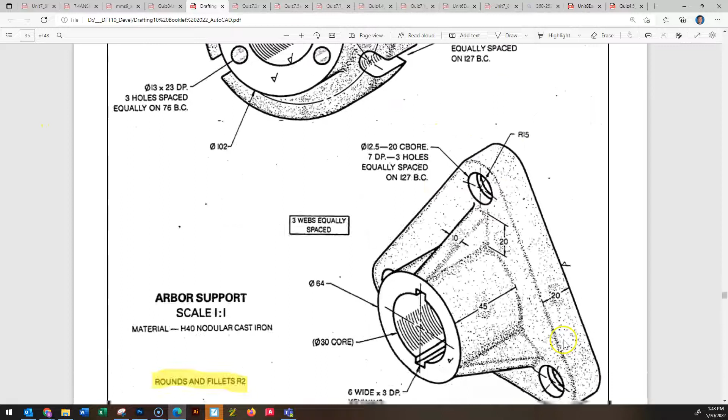You can do some practice here on the arbor support and on the rotary yoke, and I believe the arbor support is the one I want you to hand in.

The idea of an aligned sectional is very similar to a half sectional. The problem is there are sort of triangular elements in these drawings that make a vertical cut straight through the object from top to bottom. They don't give the best representation, because the bolt holes, although there is one dead center on the top, if you look down at the bottom dead center, there is no bolt hole, but there are still two here, in kind of a triangular format.

So it's generally used for objects that have triangles in them. If you were to cut this object directly in half, you would be misrepresenting the bottom part. And if you drew everything straight over by going through, say, this bolt hole, then you end up with an item on the section view that's shorter than it should be.

So what we're going to do is go through an aligned sectional here and show you how you build these things. I've created the beginning portions of this drawing already since you know how to do all of these things. I've also included a cut line that indicates this object is going to be cut down the middle to the center and then out through one of these bolt holes and one of these end feet. I also created, by hand using an arc and trim, a couple lines to make an arrowhead indicating this is an aligned sectional.

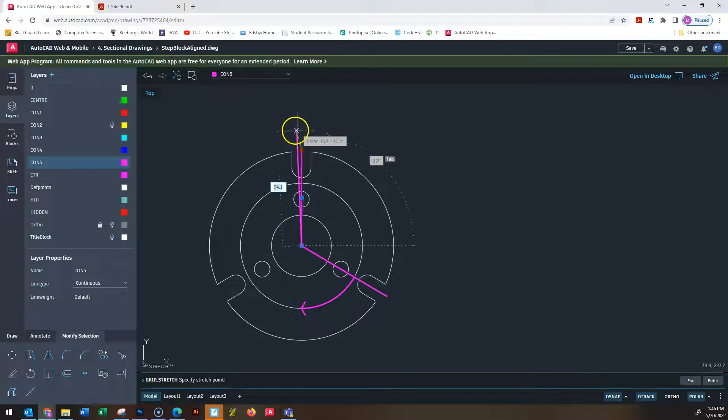Just extend my cut line a little bit, and I did make my cut line thicker as I normally do. I believe I've got this set at 0.3 millimeters, so that's a good measurement. You might want to do the same.

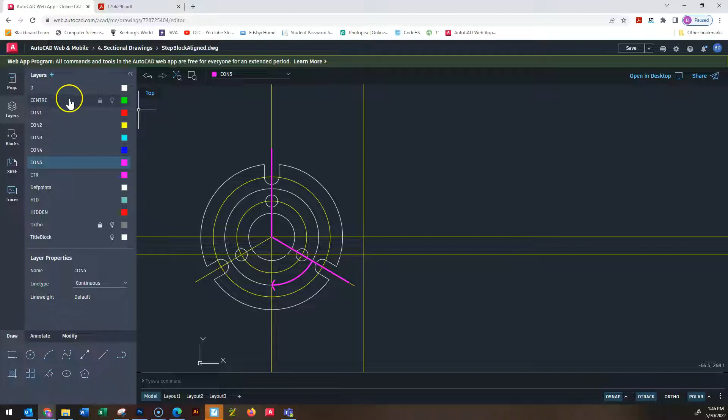I'm going to turn on my construction lines here, and I've just got a starting point. Remember, whenever we turn these objects, we always turn them so that the nose is pointing toward the front view. So my nose section is going to be here, and I should put some construction lines down to help me out with those heights so I don't have to do a whole bunch of measuring. I can just sort of trace them across. So I know that I'm going to need a line there.

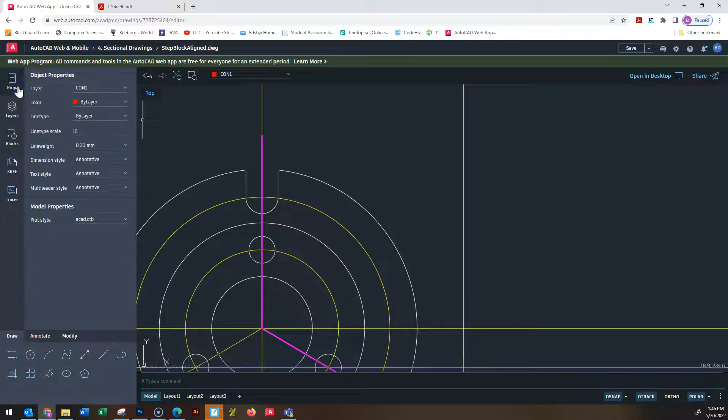Oop, still got my line set at 0.30. Don't want that. Properties, that should be set to by layer.

So let's draw some construction lines for heights that I know I'm going to need. Need to know where that slot is. Going to need to know where the bottom of that slot is. Going to need to know where this nose is. And where this circle is.

Top and bottom, and then I'm going to throw some center lines in just so I don't have too many lines of the same color running across my page. So I'm going to turn this one right here. I'm going to call that a center line.

Oops, change it. It already exists, so I'm going to select it, and I'm going to go to my properties. I have the right line selected, this line. Go, and I'm going to change that to layer 5 so it's a different color.

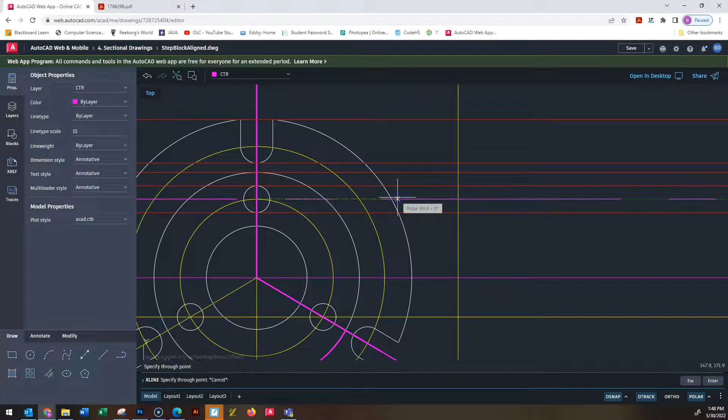Then I'm going to draw a couple more to represent the center lines for that drill hole. Except I don't want the actual center line pattern, I want it to be a continuous line, and then I'm going to do the same thing one more time. I didn't want the long dashes, short dashes. I just want it to be a line that demonstrates where the center of these circles, holes, and features are.

Once again, this is going to be, by default, the center line pattern.

So I'm just going to change that so that it is continuous. All right, so I've got some features there.

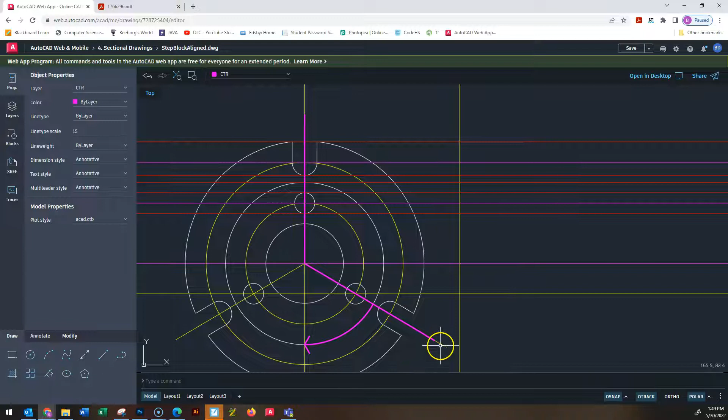When I'm drawing an aligned sectional, almost always the bottom half looks exactly the same as the top half. For instance, if you were to rotate all of these features down to the bottom, they mirror the top part. So you really only have to build the top half, and then you can just mirror it downward if you so choose. The bottom portion is going to be a full section.

Did I say this represents a half sectional? Let me revise that a bit. Sort of. When we do a half sectional, it's really a quarter of the object, right? You're seeing the inside of the object as well as the outside of the object.

So the cut line goes down to the middle and then it goes straight out the side. That would be a half sectional, whereas the full sectional is really half the object, right? You go straight down the middle and out through the bottom, and that will give you a full sectional representation. So it's sort of between the two, I guess.

It's probably closer to a full sectional because instead of going straight out the bottom, I'm going out here, but I'm also rotating all that stuff to the bottom. So it's probably going to look more like a full sectional than a half sectional, but the idea that it doesn't go directly out the bottom is sort of like a half sectional. So I guess it's kind of a combination of the two.

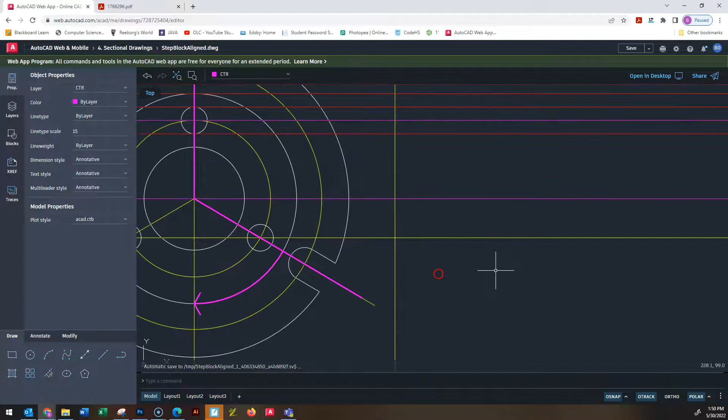Okay, now I've got to go back to my drawing, and I need a little bit more information. I only drew the front view, so I didn't represent any depth in this object. So there's a couple things that I notice in here that I just want to make clear.

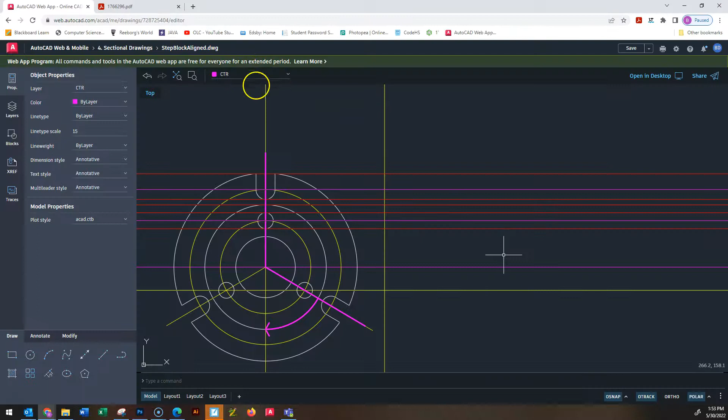I know the entire object is 42 long, from the very front to the very back. I have a starting line set up here, so I'm going to go to the back of the object, select this line, and offset it 42 to find out where the back of the object is. So the back of the object is right there.

Now I can use some object lines, because I'm just going to give myself a rough outline of where this object is going to be. This is the back portion, and this is the very front portion, including the nose. So I need to figure out where that back portion sort of ends before it starts narrowing into the nose, and the dimension is given right here.

It's 25 from the back of the object. So I'm going to go to this back of the object line and offset it 25. So from the back of the object toward the front, there's 25 — that's where the thickest, larger portion of this object is. So I'm going to draw that out. If I have to trim these lines a little later, that's fine.

As I mentioned before, the top side of the object can be mirrored down to get the bottom, so I'm only going to draw this to the halfway point. Then when I'm happy with it at the end, I can just mirror it down.

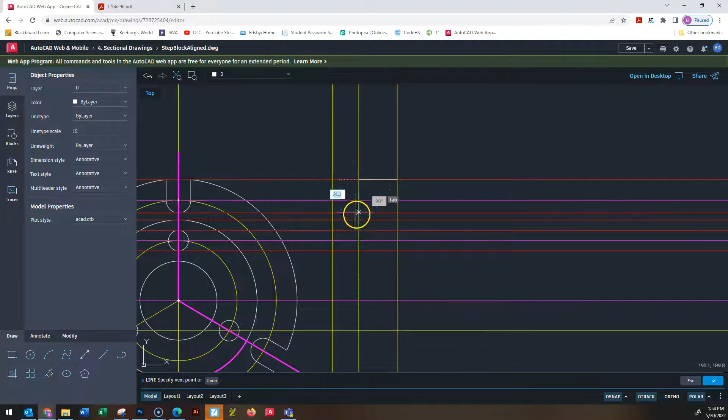So how far down does this part go? It goes down to the nose, which is that height right there, so that's this red line. Then the nose comes all the way out to the front of the object. Then I'm going to go down to the halfway point and come all the way across — that's dead center of the object if you're looking at it from the front view.

So all I've drawn is basically the top half of this object, and I haven't drawn any of the circles or features yet. I've just drawn a rough outline of where this bigger part is and where the nose is. Now we can start getting a bit more detailed on what this actually looks like.

If we're cutting this directly down the center, what we're seeing is essentially this, down to there, because we've cut it on the other half. So we need to make sure we can see the bottom of this little feature as well as this top part. We can see the top part right there. The bottom part here is just going to look like a line straight across.

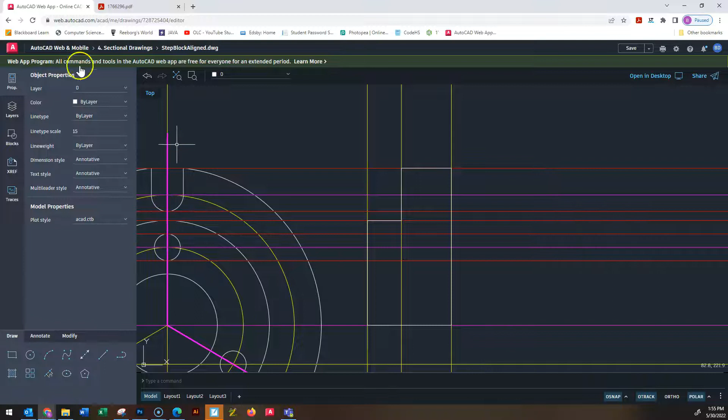So I can just stick with my object layer and make sure I'm at the bottom of that little trough, and all you're going to see from the side view, if that's cut off, is just a line there. Okay, then we've got solid material from that feature until this bolt hole.

This bolt hole has a depth. It's in the nose, but it doesn't go all the way through the object — it has a depth of 23. So I need to note where that 23 is, because that's where these bolt holes have to end, which means it's 23 from the front in the measurement they gave us, pointing at the front of the object.

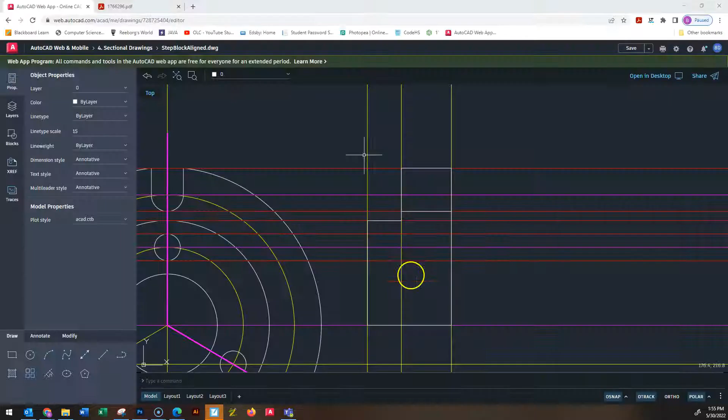So that 23 deep means that this line at the front of the object needs to be offset backwards — offset 23 backwards, which puts it right there. This yellow line here, you'll notice, is in the thicker, larger part of this cylindrical object, which means it goes all the way through the nose and into this back plate a little bit. That's what that yellow line indicates.

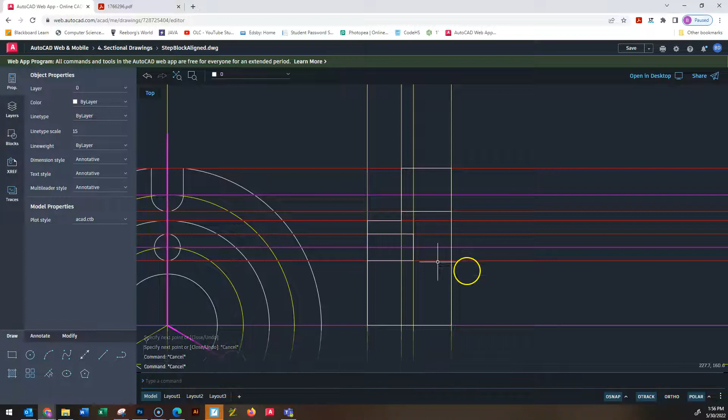So we already have the other lines that we need. We just need to find where the top of that circle, or bolt hole, is and the bottom, and make sure we start at the very front of the nose and go back until we hit that yellow line. Then we go down to where the hole ends on the bottom and straight out the front again. So that indicates a hole that is only 23 deep — it doesn't go all the way through the object, there's going to be solid metal behind it still.

That gets us down to this inner bore, which I didn't draw a line across for, and I should have. So I'm just going to copy this — CO for copy — and then grab a base point, some intersection, and bring it down to there.

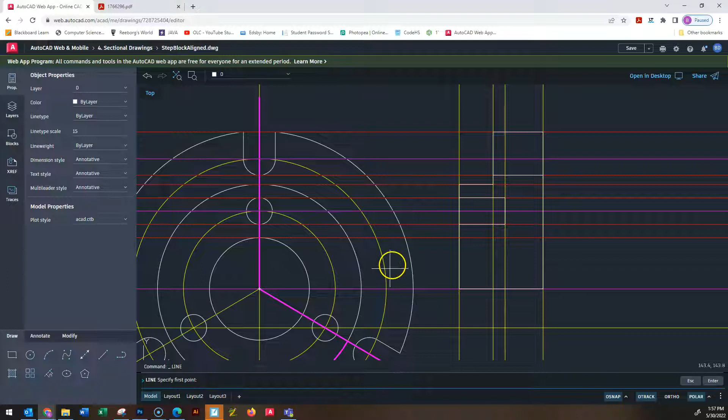So I have the larger bore opening, that's the big hole in the middle. At this point, I should draw that to indicate that it is going through, and it goes all the way through the object, so I can draw this straight out to the back. So this hole goes all the way through the object and out the back. I'm going to indicate that.

At this point, I should probably turn off a few construction lines just to show you what we've drawn in our object layer and what relates to what. So this section up here represents half of this U-shaped feature, the part you can see if you cut it in half. This right here represents the bolt hole, which only goes in 23 units. If you cut that in half, you'll just see this is the bolt hole, and the rest of this stuff is just solid metal. And right here is the first half, or the top half, of the bigger opening, which goes all the way through. So that's what I've represented so far on this sectional view.

And I do not want to forget about this little cutout area in the rear portion. It's a diameter of 58 and it goes in 10 units. So I'm going to offset from the back of the object 10 units toward the front to take care of that little 10.

So I can basically use any line I want. I'll keep those other construction lines off for now, just to reduce clutter and make sure you know what I'm doing. I'll recreate that line right there, which represents the back of the object. So I'll select that line, and then I will offset that line 10 toward the front of the object to represent this measurement of 10.

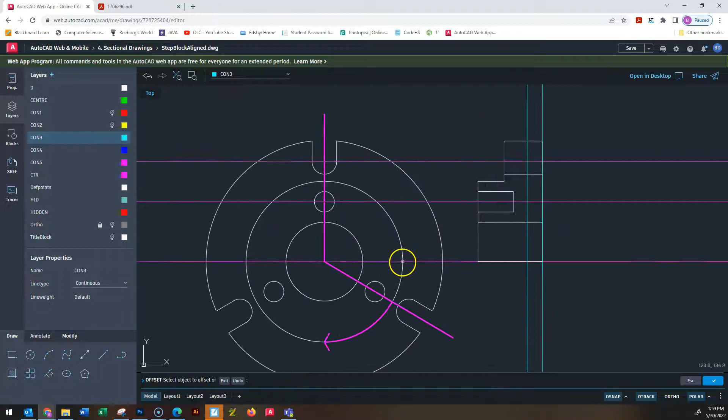This gap right here. Now I need to know how high that little cutout goes from the center. They give us a diameter, so it's 58 from one end of this to the bottom. I'm only going to the halfway point, so I'm just going to chop that in half and find what the radius would be. So from here to the center of the object, half of 58 is 29. So if I offset this middle line 29 straight up, that's going to give me the point where this little cutout ends.

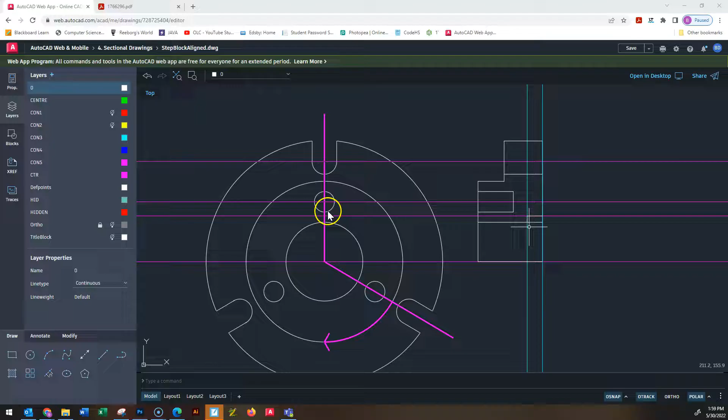So now I can draw that in my object layer because I know it goes in from this point. Let me make sure I got my line tool on. Okay, so I know it goes in from this point, 10 units. So there's the 10 units, and then it goes down to where it hits the larger hole. So this part right now goes down, and then it just runs into the bigger center bore, which means that this line right here is no longer needed.

So I could cut out this chunk right here, or I can just bring it back to where it intersects with that larger gap. Turn off my construction lines here, again just to keep it nice and clean. What else? I got those ones on.

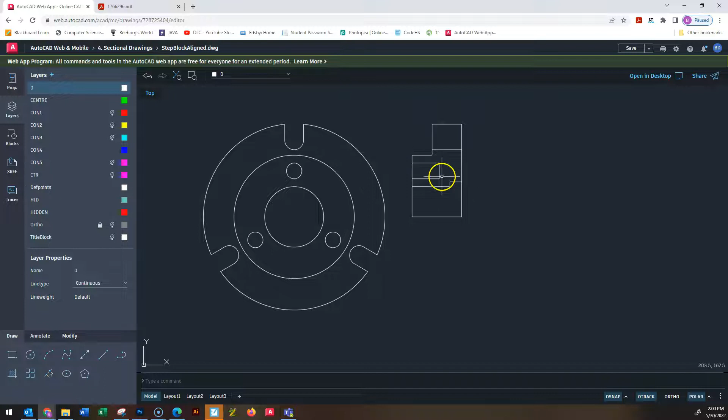Great, so the only thing I added there was this little chunk right here to represent that portion that was hidden on the front view, but we can see it's clearly notched out, which means it's clearly notched out through the entire object, including where it hits this.

Because our aligned sectional's goal is to take this lower, or this right sort of third on a 60-degree angle, and visually just pretend that we spin this entire thing down. It is actually going to mirror the top. There's nothing different on the bottom side or on this portion than what you see up here. It is exactly the same, which means if I mirror this part down, I'm okay, I'm in good shape.

But first, I'm just going to delete, I'm going to keep that, I'm going to mirror it down. So I'm going to select everything that I have so far, and then I'm going to select the mirror tool. And then it needs to know, what do I want to mirror? What line do I want to mirror it over? Well, the line I want to mirror it over is just the horizontal line right through the middle. So I can do that.

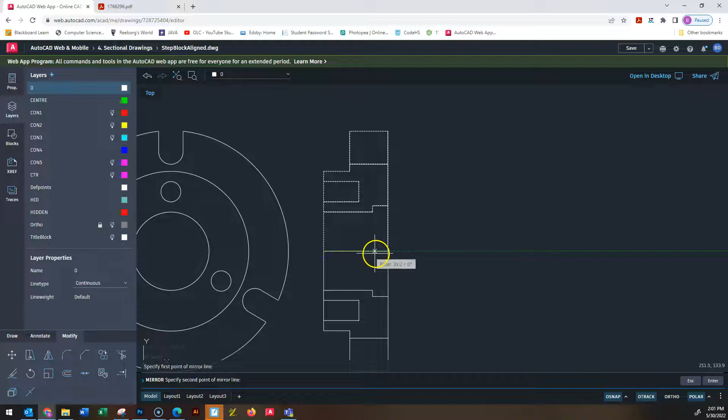I don't know why this is. Every time that I mirror something, I'm sure you've seen this in about 10 videos so far, I get it to this point, and then for some reason I click and I forget to hit the space bar. The space bar at the end is what says, yeah, this is what I want to do.

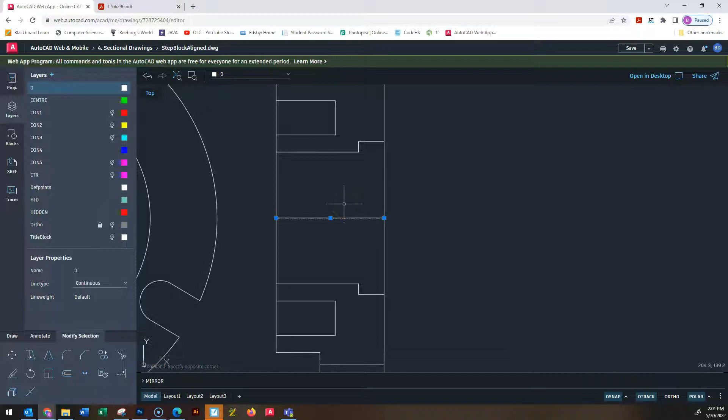Okay, now I'm going to get rid of this line that I had right in the middle because it doesn't actually exist. It is going to be replaced with a real center line. And it won't let me delete. Let's try again. There we go.

So I think we've got this object pretty well dialed in. Now we should crosshatch the areas that we know are bare metal. So we'll go to our crosshatch section, and we have to modify this a little bit depending on what sort of hatch we use. I'm just going to select the areas that I know need to be hatched.

Actually, that's not an area because that's a cutout formed by this U shape at the top here, so that's not part of the material I want crosshatched. I want everything in here crosshatched except for the bolt hole, so that's the outside area, and the same thing on the bottom. Really those are the only two crosshatched areas, because this is the little U cutout, this is the bolt hole, and this is the larger inner bore.

Okay, so let's hatch that by hitting space again, and it's going to give us that ugly default angle iron, whatever it is, hatch. So we're going to go into our properties for that. Our hatch pattern, we decided on line being the nicest of the bunch.

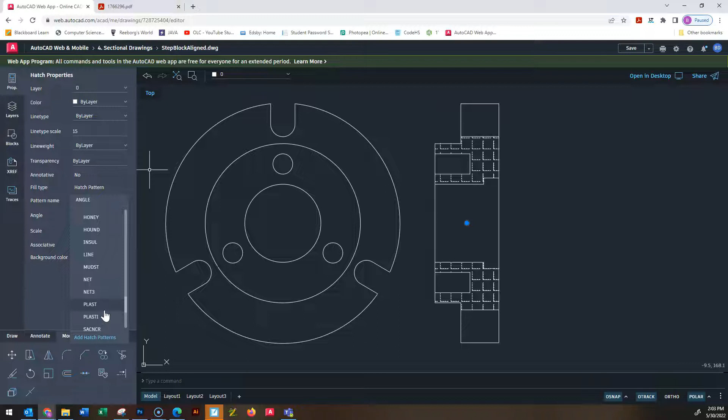So let's find our line. It doesn't like that search, so I have to find it manually. Line, there it should be. Okay, so let's do line, and then we don't want straight across, we want an angle. Angle 45 is fine.

And then what sort of distance have we got between them? That's probably okay, but I'll just double that scale to 2 to get a few more lines. Oh sorry, my mistake, we'll have it 0.5 - just get a few more lines in there to make it a little more obvious that that's a hatched area.

And now we'll worry about our center lines and center marks - this is really just trivial. We also have a round that I forgot about. We've got R6 on the outside of this larger plate, and also where it meets the nose. Actually, that's going to affect our hatch a little bit, and I'll show you why.

So I'm actually just going to get rid of the hatch - good thing I double checked. And we're going to put in those rounds. Those rounds are happening up here, and in this section right here. If they don't happen at the end of the nose, you can see that's a very sharp line, not the little straight dainty line.

So let's do these fillets right here. R6 on the fillets, I believe - yep, R6. So we are going to do a radius of 6, and then you just pick the two objects you want to round. I want to round that one to that one, and then the exact same round or fillet from there to there. So we've got those two rounded out.

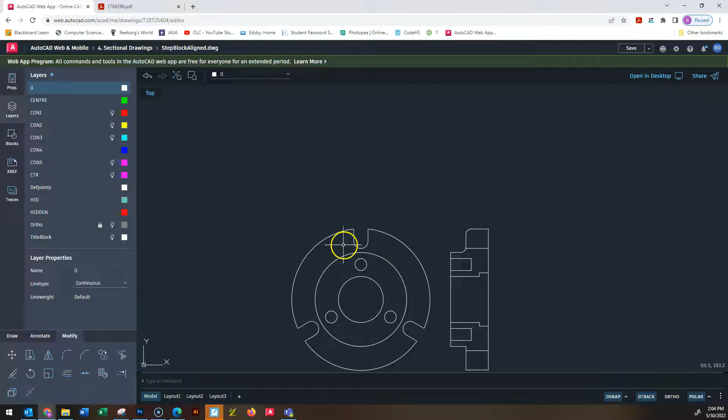And the nose - yeah, okay, that looks good. The reason I did that before I hatched is because my hatch goes in this area, so if I had it closed off with that 90-degree corner, it's not going to hatch around the rounded area, and I need it to, to be accurate. It's not a huge deal if I wouldn't have done that, but the hatch definitely wouldn't look quite right.

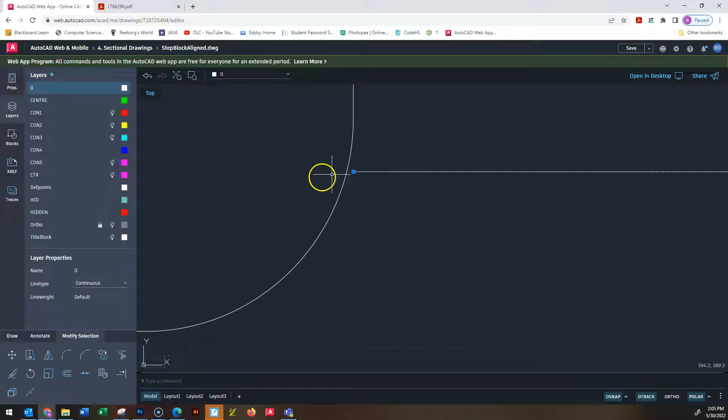Alright, so I've got my hatch going a little too far - I don't want it to hatch in that section. I suspect that might be happening because this line I drew right here was prior to the hatch, which means I have to bring it out to where it meets that rounded area.

So when I said the hatch, I meant the fillet. There was a little gap in there, and when there's any little gap, when you use the hatch tool, it tries to fill that gap, just like water flowing through an opening into another space.

All right, so the top half is filleted properly now, which means that my bottom half is incorrect. So I'm just going to select everything in the bottom half of this object, delete it, and then mirror it again.

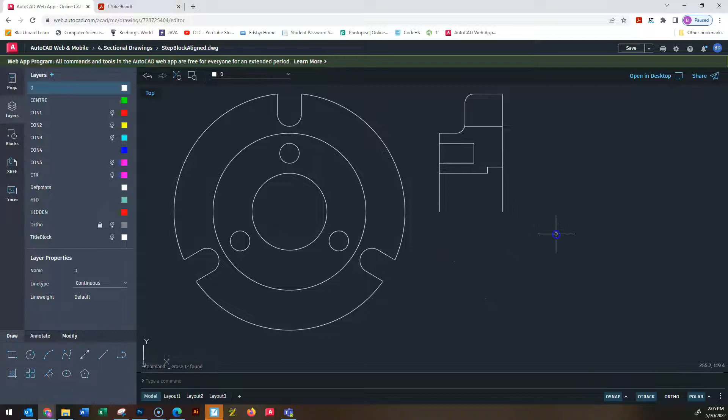So now that I've got my fillets correct, I might as well hatch it here and then mirror the hatch. We'll take our hatch, make sure it's just grabbing this area and not the area above. It looks good now that I've joined those points up. Okay, so we know we're doing a hatch - hit spacebar, it'll fill it.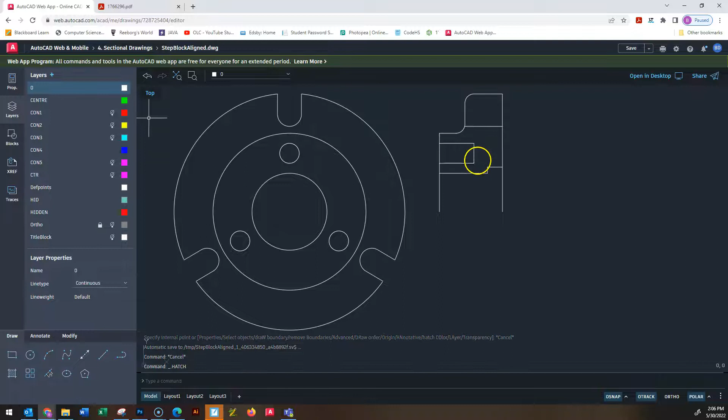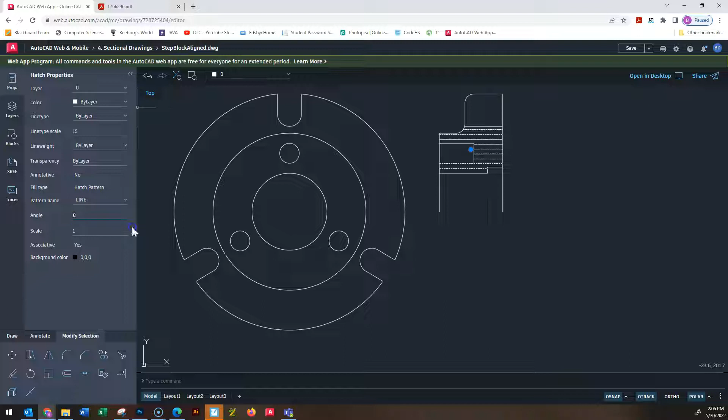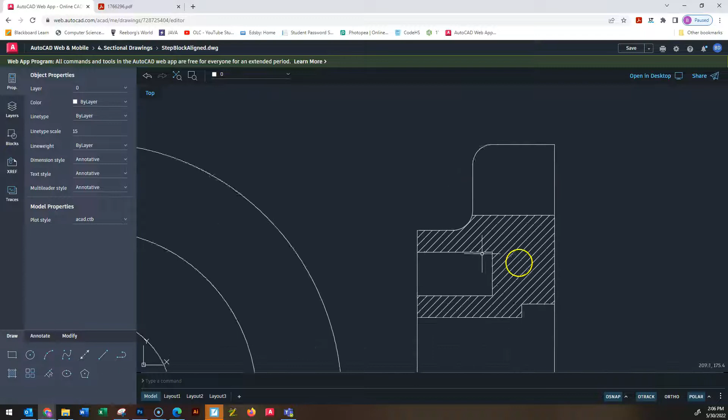There we go, fill it with that angle. Let's go to our properties. Our hatch is going to... I wonder if it's capitals. Line, yeah it's capitals, there we go. Line, and our angle was 45, and we decided the scale of 0.5 looked pretty good, at least I decided. Okay, so that is a nice hatch there, and you'll notice if I go into the rounded section, the hatch includes the area that would have been a little short. If I kept that angle, you wouldn't have seen hatching in this area before I did the round. So make sure you do your hatching last.

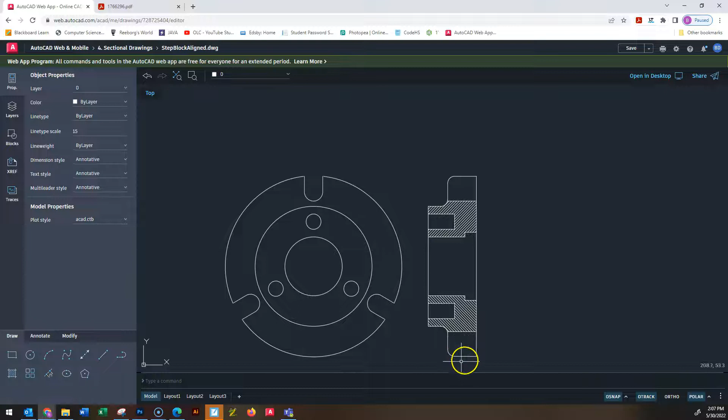Now I'm in a position where I can just copy that top half. By copy, I mean mirror it, because I want to mirror it down from the center line, which is really an imaginary line that runs right through the center of the object. Hit spacebar, remember that this time. Everything should be mirrored down properly. Our rounds look good, and now it's just closing up our object the way we normally do with our center lines.

I'm actually going to change these to my green center line. This is the one I've got for indicating where the center is, and I usually use the purple one as the marks that I leave on the drawing for center lines and center marks, so I'm actually not sure why I used purple there. But I can change it to this center, which is the one I wanted to use in the first place.

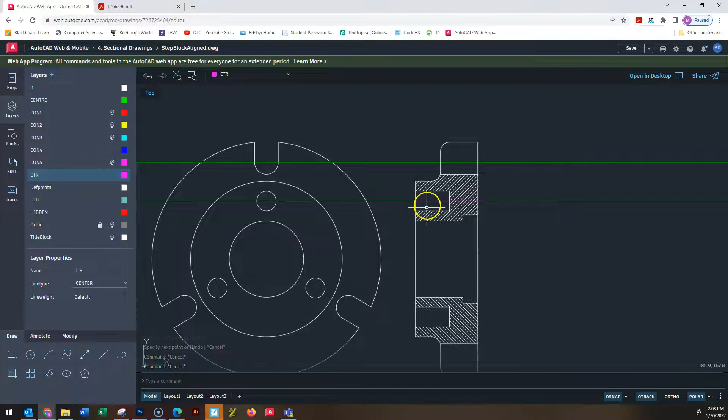Now when I go use the real center line, I'm going to start inside my object, and I'm going to go out the back and a little bit out front, and try to match it up with what I've got at the rear there. Actually, if you've got an object like this, you can draw it too long. It's not a big deal, because you can just grab that line afterward and move it from the middle point of the line, the middle point between here and here, which probably I've marked somewhere.

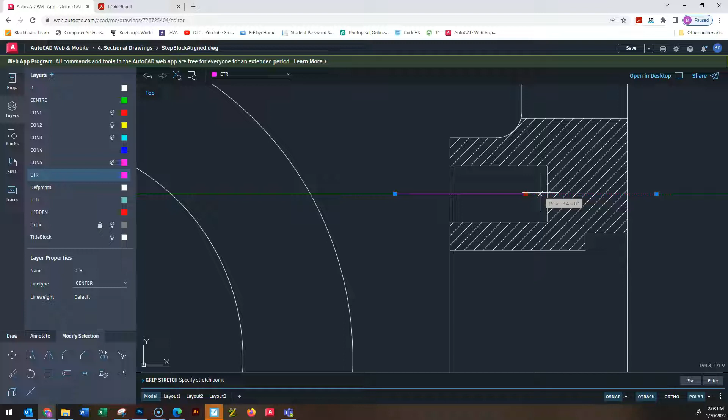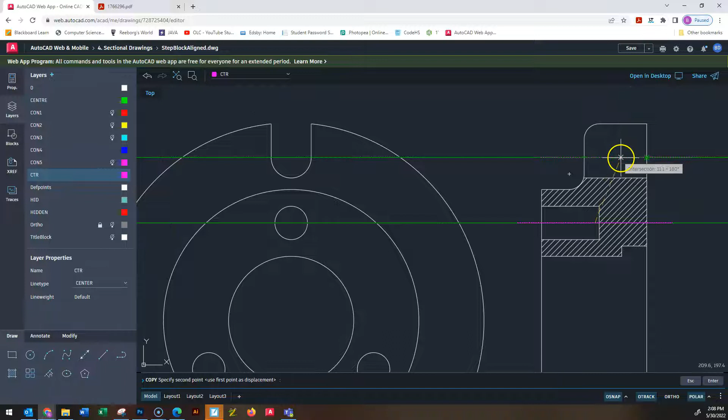Okay, and I'm going to use this same center line, so I'm going to copy it, CO, right from the middle of this thing, and put it in the middle of this one. I don't have a midpoint here, so I'm going to just kind of estimate this one. I can always change it if I want to, and I can mirror that down after I'm happy with everything else. And then I also need another one from here, dead center, which will be right there.

Okay, now none of these lines appear to have the long, short, long dashes that we need, so what I'm going to do is select them all. I'm just going to hide my other layers for now. Okay, and you know what, I'll do that as my very last step because I'm going to want to do it for the center marks too, so just changing my mind a little bit there. Okay, now I'm going to mirror these down. MI for mirror, and I'm mirroring them based on the center of this object.

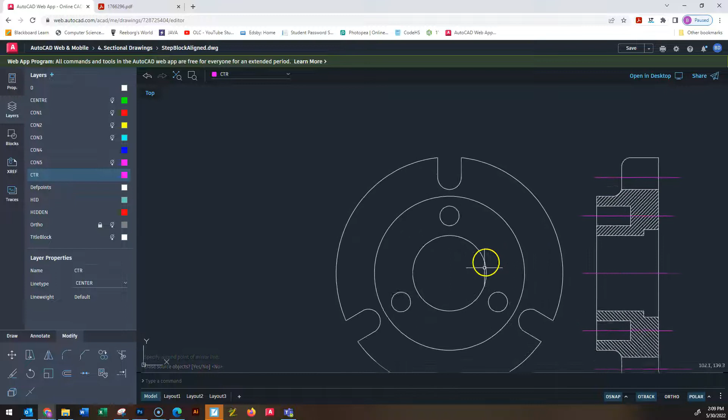Okay, so I've got the bottom portion there, and now I need to make some center marks for all these bolt holes. There's an automatic tool for this in the real version of AutoCAD, but we've got to do them manually here, as I don't think they have the center mark feature in this version. Not a big deal. Okay, center marks, so this one needs to go to there.

Okay, and then I can just do a polar array with this. I will do a polar array, it's good practice for polar arrays. It's going to be polar, and our center point is going to be there, and I'm just going to pick the number of items, it'll space them properly, 4. So there we go, and you'll know it's dead center and perfectly measured.

Same thing for all of these bolt holes, exact same process. Do a polar array, center point is the center point of the circle, and then how many items do I want? I want 4, so it just makes a little crosshair, and now I am in a position where I can take that and copy it a couple more times, CO copy from the... whoops, not from there, mouse is a little slower today here, from my browser. Copy this from here to there and there, and is it big enough to be there as well? Sorta.

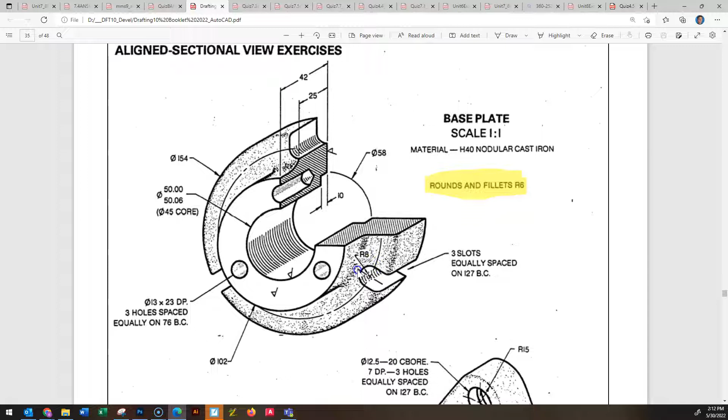I think I'd like it a little bit longer. Okay, now this one here, the center point looks weird because the hole is on an angle and the center point is straight up and down, so that looks a little bit weird. You'll notice that the angle here on that center bolt makes it look a little bit more natural. So if I'm going to draw one up top, that one's going to be easy, that one's just the way we would draw any of the rest of them, just go up or left a little bit outside the object. And then this feature is just a little bit bigger than the hole, so I just wanted these center marks to be a little bit bigger.

It's the exact same process. Polar array, okay so polar array, center is our center point, how many items? Still want 4. Okay, there we go, and then I'll take the same line.

Now this is not strictly necessary, okay, but if I can make it look good, and I think it helps, I'd leave it there. So I'm just debating rotating this a little bit, RO for rotate, and if I rotate it 60 degrees, that looks good. So that looks reasonably indicative of a center point. I don't think it complicates the drawing. I think it helps by indicating that's a center point.

So I'm going to take the exact same thing and do it over here, except that this one needs to be angled differently. Same process, grabbing the top one, copying it from the center to the center, and then I'm going to rotate this. RO to rotate, the same thing, just in the other direction. I want to make sure that this is at 30 degrees from horizontal.

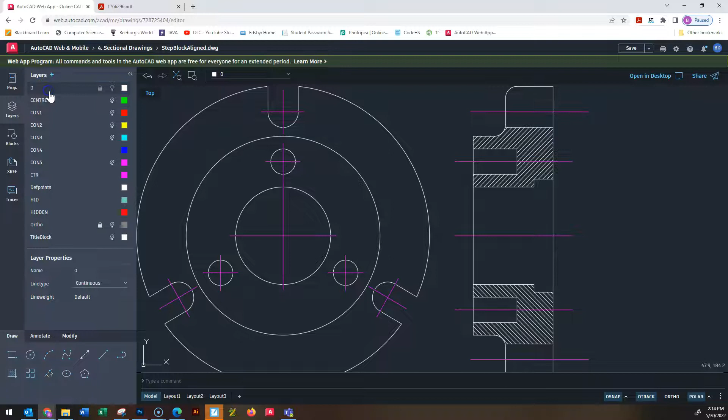Okay, so I think that is all right. I think we've got everything represented. One more thing, now that I look closer, I should do some measurements here as well, but as I look at this, the only other thing is you would be able to see this, because it's deeper, this section is deeper than this section. If you cut it in half, you'll see the point at which it becomes deeper. So that line does need to be there. And I think everything else is in good shape.

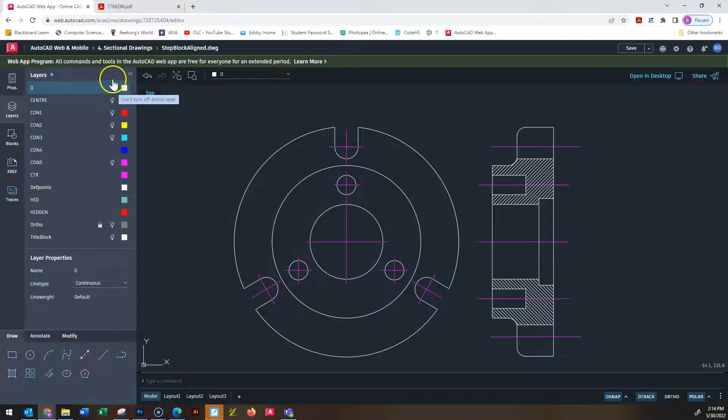I'm just going to turn off my real object line right now, just hide it, and then I'm going to grab all of these center marks. I'm going to go into the properties for those center marks. My line type scale is fine. My line type needs to be... not hidden, I'm sorry, center. But it also needs to have a scale that shows the long dash, short dash.

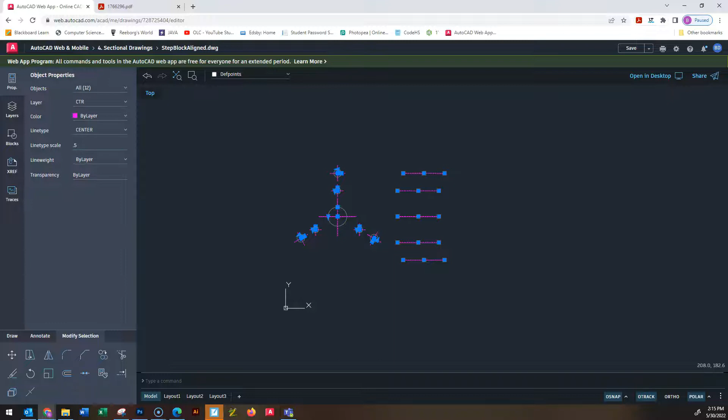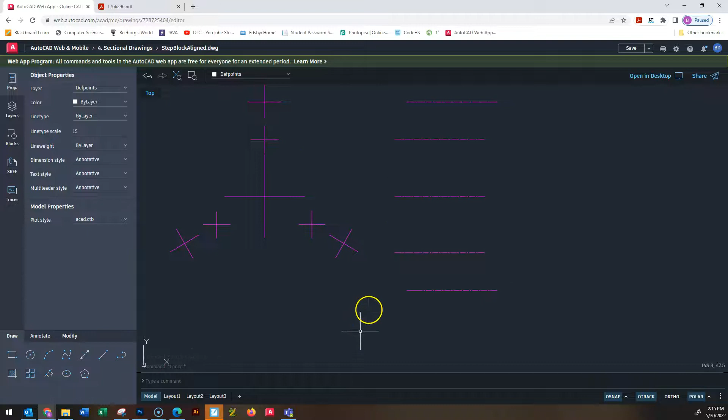So let's try 0.5, let's see what that gives us. Long dash, short dash, looks okay here. For some reason I didn't get these ones. Center, 0.5, let's try 0.5 on those ones, let's see. Okay, still not seeing it on the center marks. One. Yep, nope, still not seeing it on my center marks.

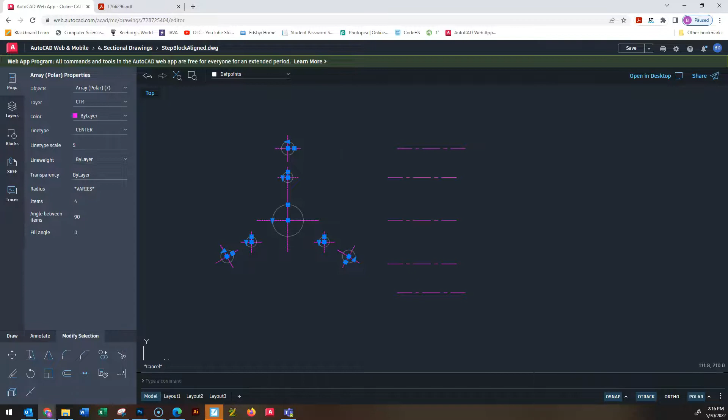These ones are okay, that might actually be a little bit small, so let's try again. Let's try maybe 2. Okay, 2 looks good for these ones. I might just have to leave these center marks as they are, because if I adjust them, I'm worried the other ones are going to change too much. Let's try 5, but making it bigger shouldn't actually help. Making it smaller would be the only thing. Okay, so I'm going to have to keep those center marks as they are.

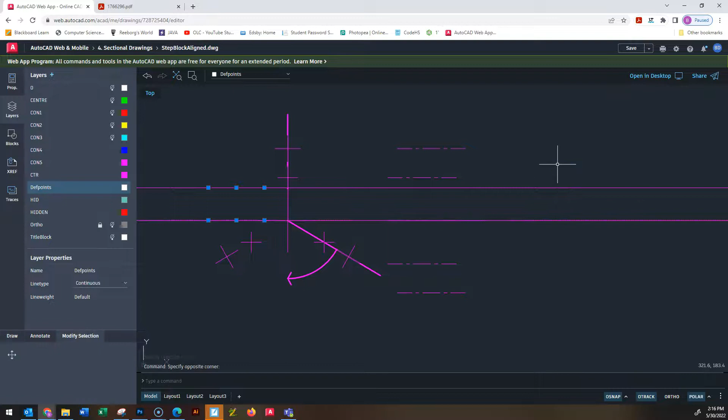Again, you got to use some judgment every once in a while as to, should I include a certain set of lines, should I not include a certain set of lines. All right, I got to keep con 5 on, because that shows my cut line, and that also shows this, and these aren't supposed to be on layer 5, so I should get rid of those. This line here should be the thicker one.

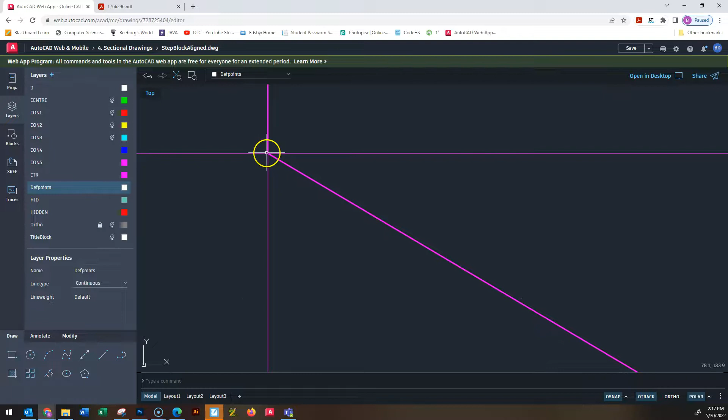Okay, that's all fine, I'll turn my object lines back on. Should be able to see my cut line dead through the center. Okay, that's good. Cut line goes out through this section here. Okay, there's an indication that this is an aligned sectional with this arc and arrow.

And then you've got your aligned sectional, including your center points and center lines in this view. So that's how you do an aligned sectional. It's really not that much different than doing a full sectional. You just have to remember your cut lines and to indicate that it's aligned by rotating this way.

And could we clean up this drawing a little bit? Yes, possibly. Maybe there's some things that I could do a little differently. Maybe you don't feel like these center marks are helping much, so it wouldn't be terrible if you got rid of that one. Could also get rid of this one if you really wanted to. Depends what you think makes the object representation or the picture more or less useful.

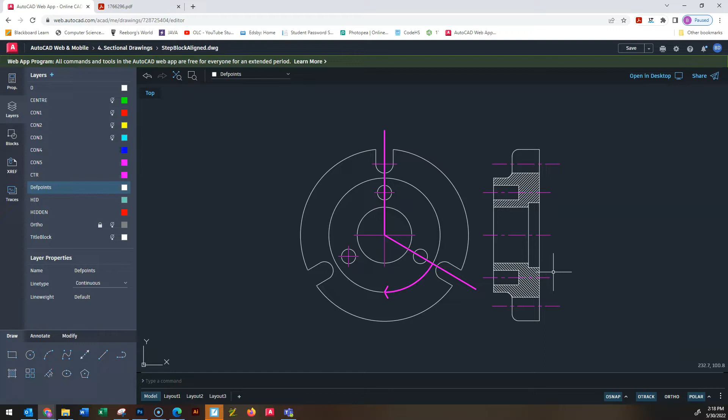So there could be a debate made that maybe that one doesn't need to be there. Maybe it's helpful to have that one there. Again, you're gonna have to use your judgment on some of this stuff, and there isn't necessarily a right and wrong answer. But you should have enough tools in your tool belt now to give the stabilizer yoke a shot, and then complete the assignment for aligned sectionals. As always, if you've got any questions, please let me know.